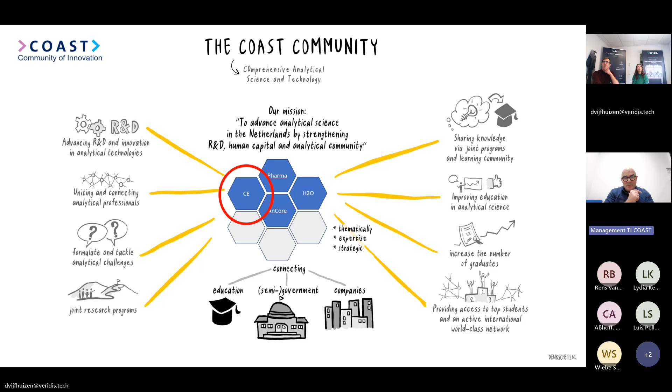What does it mean, this community of practice? You can look at it as an active learning community, working together with knowledge institutes, the market, and of course the students. Together we have a proactive community-driven approach, and the topics of interest are the ones that are derived or proposed from the market, since there is an issue and we want to solve it.

The approach is an active learning approach, a combination of workshops such as knowledge transfer, but also use cases. At what you hear today, we would like to ask you to see if this could be something of interest for your own working environment, so that we can start working together on a use case. The outcome can be best practices, insights, prototypes, and so on.

The reason why, I think, is very obvious - you want to move forward. And the activities, well, you see on the right side, can be internships, hackathons, feasibility, technology validations, public-private consortia, and so on. It's just to give a little bit of feeling of what the community is.

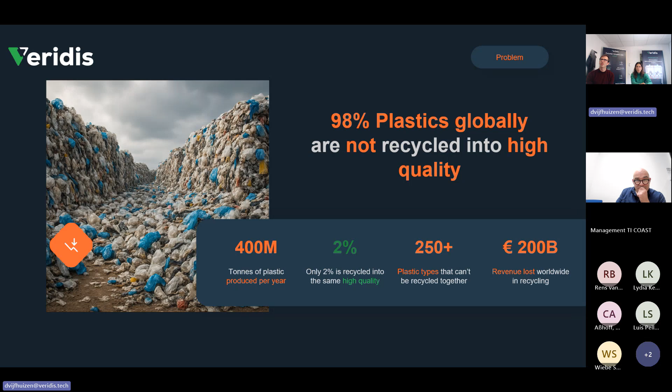We first start with the problem. Currently, 98% of the plastics globally are not recycled into high quality, meaning they don't end up in a similar product. Only 2% of global plastics are recycled into high quality, and we actively try to engage in this field to make sure that this 2% goes up.

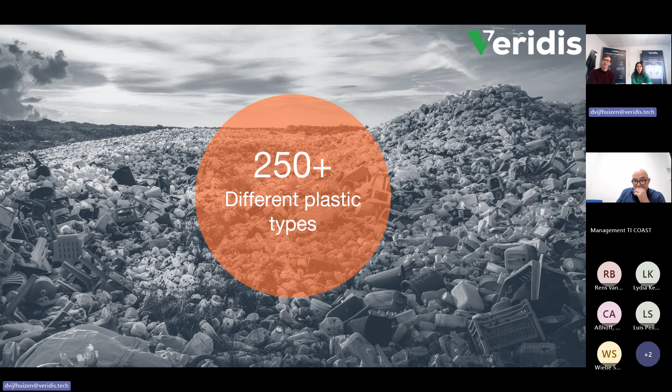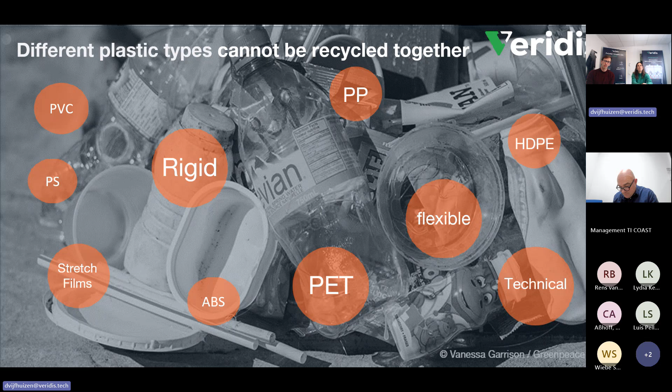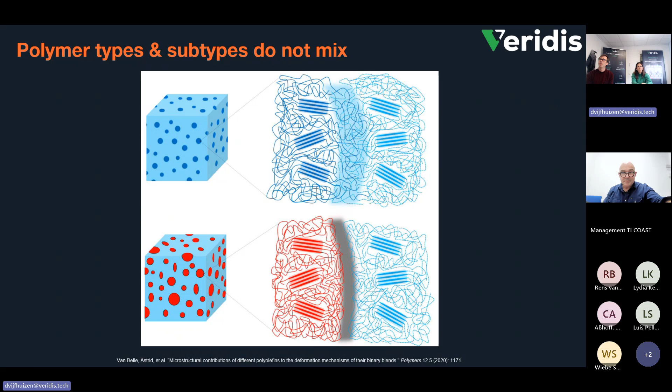Why are these plastics so hard to recycle? There are more than 250 types of plastics, and it's not possible to collect all these plastics together. You hear terms like rigid, flexibles, technicals, PET, polypropylene, polyethylene, and these cannot all be recycled together, because if plastic main fractions combine, you get voiding of materials, immiscibility, creating poor product quality.

For instance, films tear, rigids become brittle, though the ambitions in the EU are very high. We're aiming for 2030, 30% recycled content in packaging and food materials, and 100% circular plastics in 2050. This is just an example of the packaging industry.

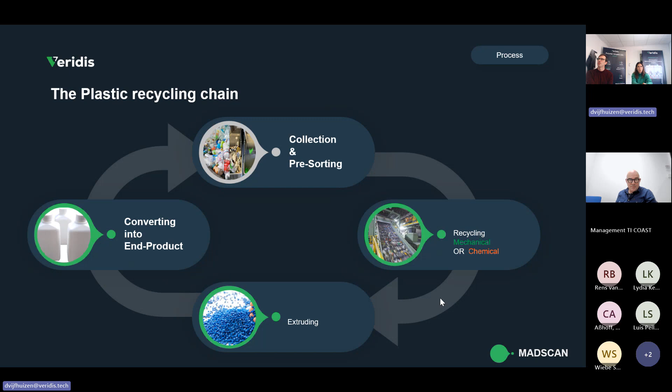But how does the industry currently measure composition and recycled quality? Inline, often optical scanning techniques such as near-infrared spectroscopy or mid-infrared spectroscopy are used next to line. However, these technologies cannot see black plastics. They only scratch the surface of multi-layered plastics and cannot detect compounds.

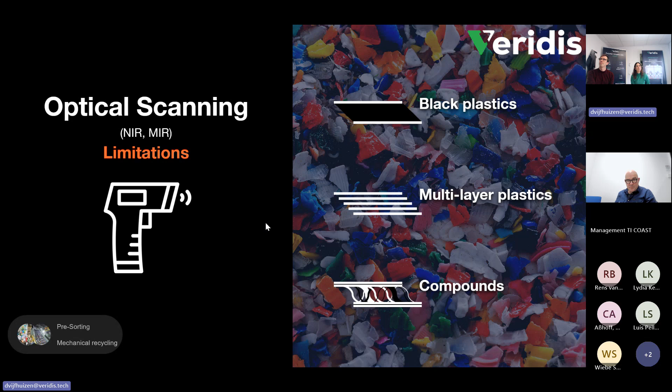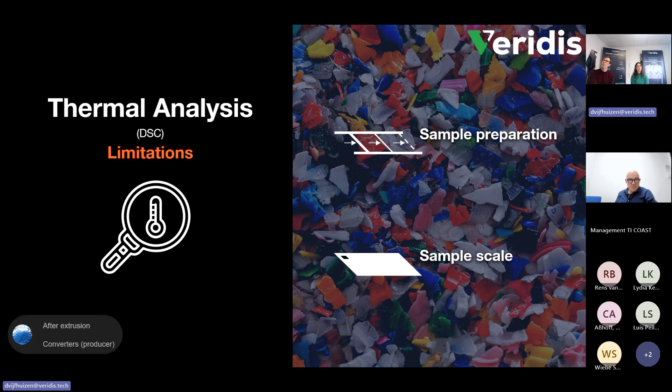Another technique that's often used, or a class of techniques often used, is thermal analysis. This can only be done after extrusion, so extensive sample preparation is needed of the recycled flakes. And the scale is not representative because it only can measure a few milligrams at a time.

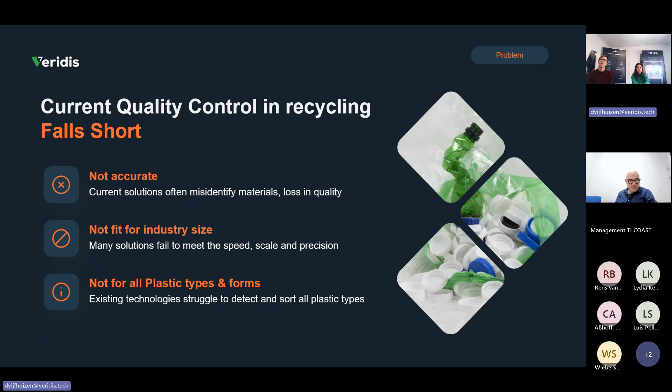So currently, recycling quality control falls short due to inaccuracy of technologies, leading to a loss in quality, or the technologies are not fit for the industry, so don't represent the scale and speed that the industry needs, and are not fit for all plastic types and forms.

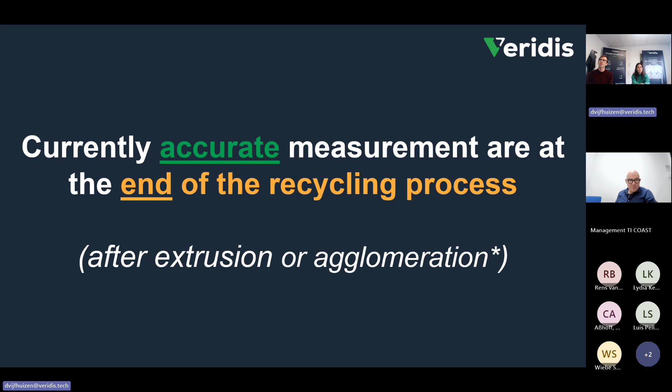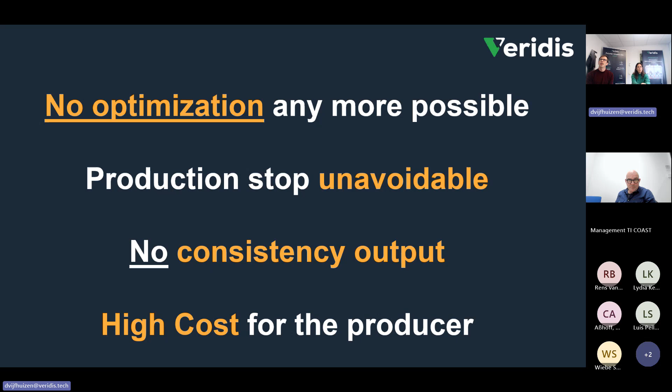So currently, we found out that accurate measurements are only at the end of the recycling process, which leads to no optimization of the recycled feedstock stream anymore, production stops, and inconsistent outputs of recyclers, leading to high costs at the producer's end, so the converting end.

If we then zoom into the recycling chain, you take a bale, which is then mechanically recycled into flakes, which are further extruded into a granulate or a compound, which is then converted further down the value chain. If we take an alternative route for chemical recycling, giving the example of pyrolysis, often this step is shortened, or all the excluded materials are agglomerated and sent to a chemical recycling facility.

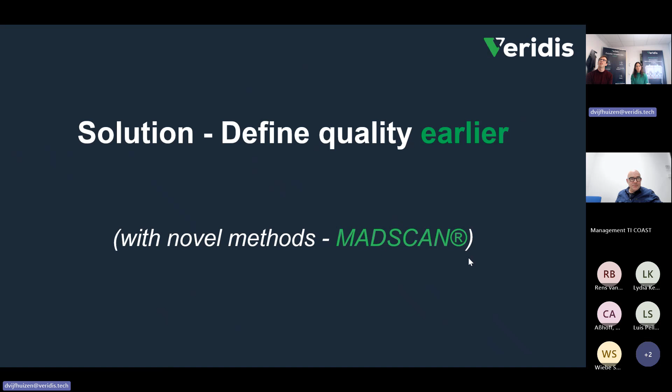But what if you could measure earlier on in the process with novel techniques like the MADSCAN? Yes, and we have the possibility with the MADSCAN to measure on flakes, so earlier in the process. And how do we do that?

We do that with a thermal analyzer, which is 10,000 times bigger than the current setup in the market. You need just simple preparation, and the sampling you can also do on other formats like granules or agglomerate, not only on flakes. Besides that, we determine not only the main polymer, but also the subtype, and we do that by thermal analysis, meaning we are heating up and cooling down.

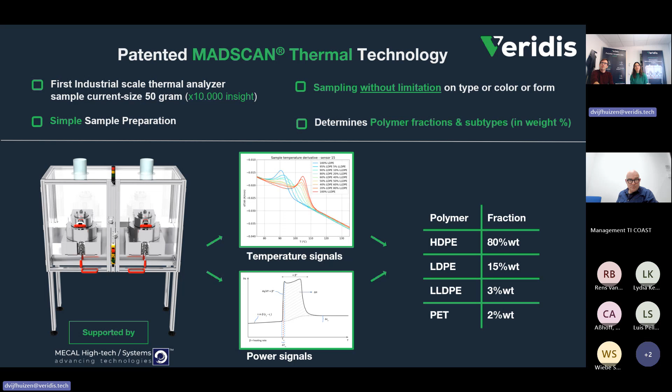Every polymer has its own distinct way of crystallizing and melting. This is what we're picking up with the data, and that way we can tell what kind of polymers are in your feedstock.

First, we will make a slab or a cookie directly from the recycling process. So when you have flakes or foils or whatever you want to measure, first we make a cookie with a sample prep tool, and this cookie is 3 millimeters thin and weighs 50 grams.

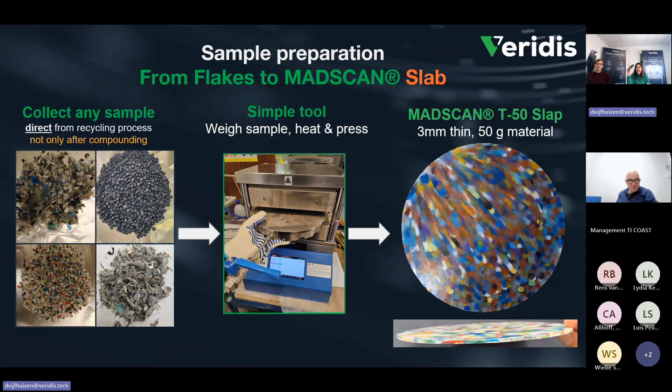We put this cookie into the MADSCAN, between the heating and cooling element and the sensor array. We're picking up the data and making the graphs.

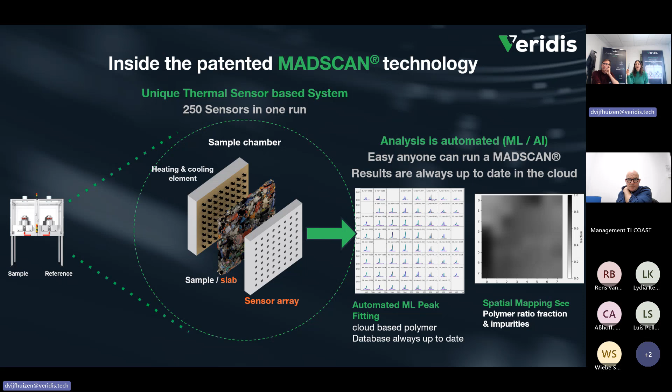Besides the fractions of the polymers in your feedstock, we can also give the distribution of the polymers in your slab. This is depicted in the right image, where you can see the black and white, which represent different polymers.

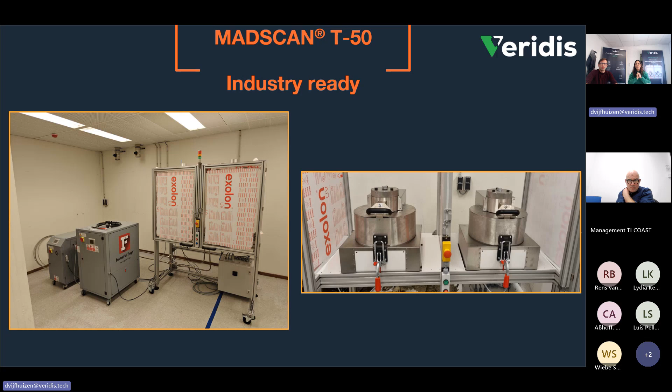Here you see the system live. We are now in Hillegom, and the first two machines are also there. What's very nice is these are robust machines, meaning you can place them in an industrial environment next to the line.

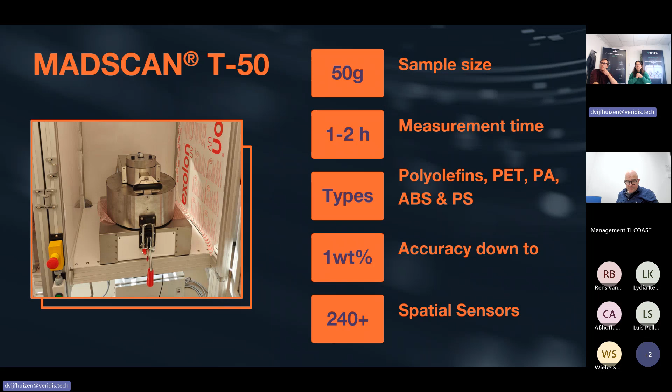50 grams, 1 to 2 hour measurement, and we can measure all kinds of polymers like polyolefins, PET, polyamide, ABS, and PS, with an accuracy down to 1%, and we have 240 sensors on board.

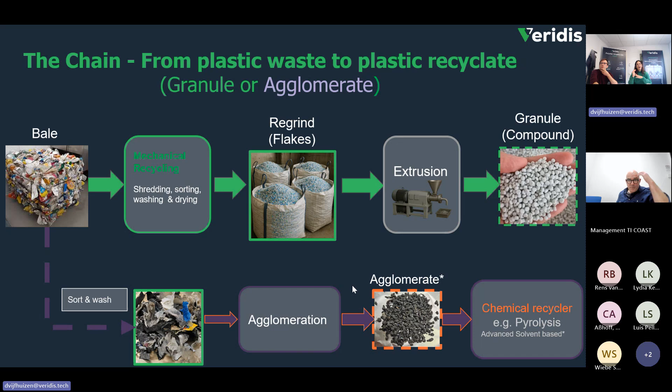Here you can see the chain. What's important to remember is that we can measure not only on granules, but also before the extrusion process and after the sorting process. When you measure flakes, you have the possibility to do something—you can sort, adjust your recipe, or add virgins. We also have the possibility, for chemical recycling processes, to measure agglomerates after or before agglomeration.

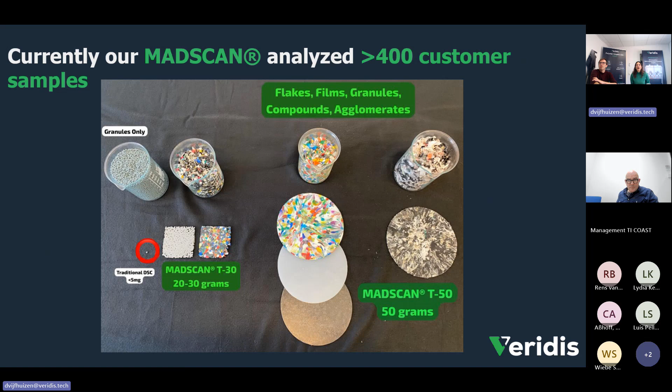Over the last couple of years and months, we measured samples—more than 400 customer samples—and we always share the results in a meeting. What we see is that the analysis sometimes matches expectations, but more often it deviates negatively, because there were higher contaminants in the feedstock or unexpected polymers. The main point is there isn't really insight into your product, and that insight is necessary when you want high quality products.

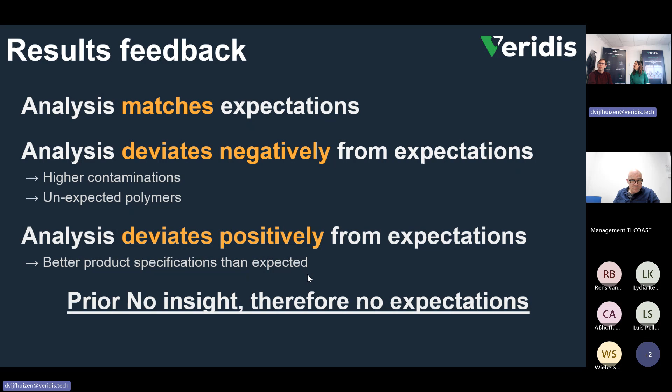So some examples: problems occur more often at the converter, when you make the product. We have some use cases, for example with an injection molding process with PP. When there is too much PE in it, you get quality or process problems. This is one of the examples we found.

Injection molders often send us granules and not flakes, so we encourage them to go to their recycler and ask for the flakes, because when you know the composition of the flakes, you can do something, and in collaboration you can work towards a nice granule fit for the process.

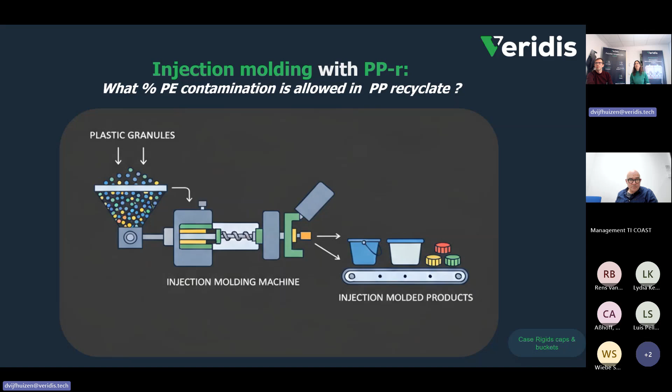Another process used very often is injection blow molding. You find this typically at packaging lines where preforms are supplied by a supplier, then at high speed the preforms are filled with air and the liquid goes into the bottle. In this case, when there is too much PP in your HDPE recyclate, you find cracks on the welding line. That means rejections in the product and production stops, which means high cost.

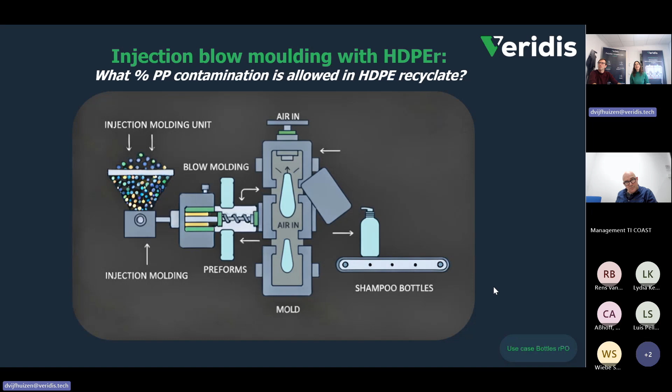Another process we have in the market is blow film extrusion. Besides contaminants, which cause gels, it's also important to know the ratio of LDPE to LLDPE, because this determines the quality of your film.

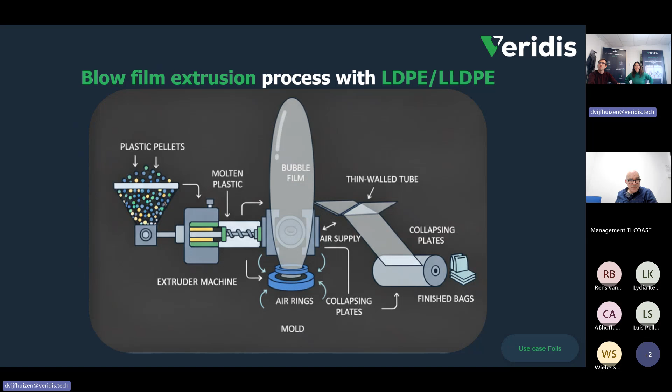In collaboration with a German party, we analyzed a lot of these kinds of granules, and in 43% of the 71 we analyzed, the results did not match expectations. So the question is, what does quality mean when the spec sheet and composition don't match?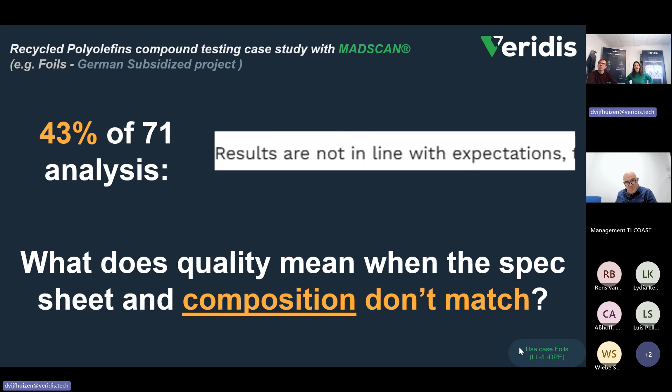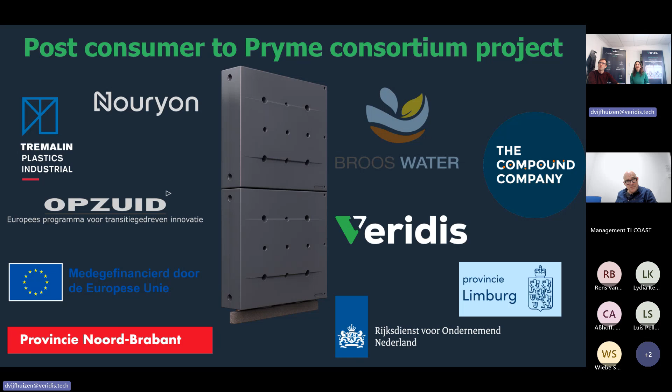So to walk the talk, together with the consortium—post-consumer to prime, with Nouryon, Broos Water the compound company, and Tremalin—we will develop recyclate near to virgin prime, subsidized by the Dutch and European government. With this recyclate, we will make rain blocks using an extrusion blow mold process.

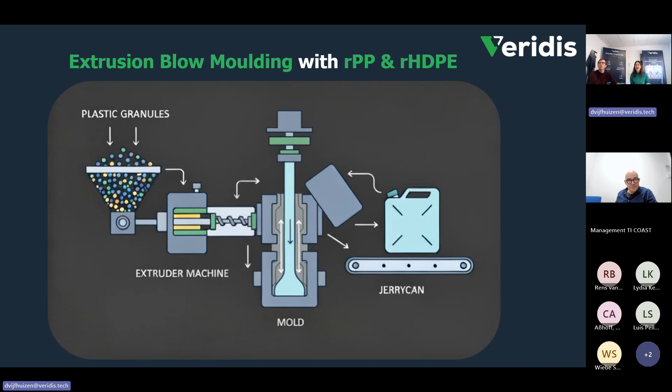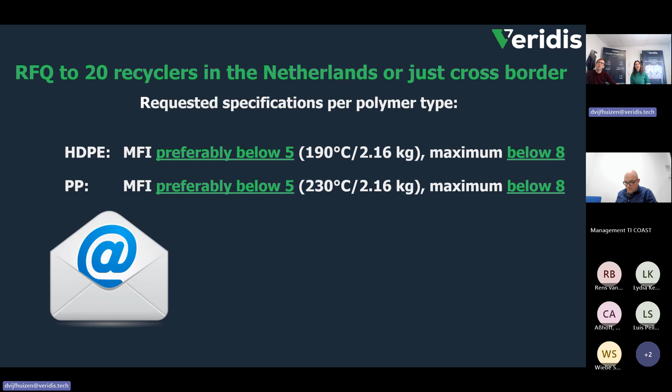In this case, it's also important to have a high viscosity and a low MFI, and that's why we are also looking for regrinds—HDPE and PP. So if you have some products, you can contact me.